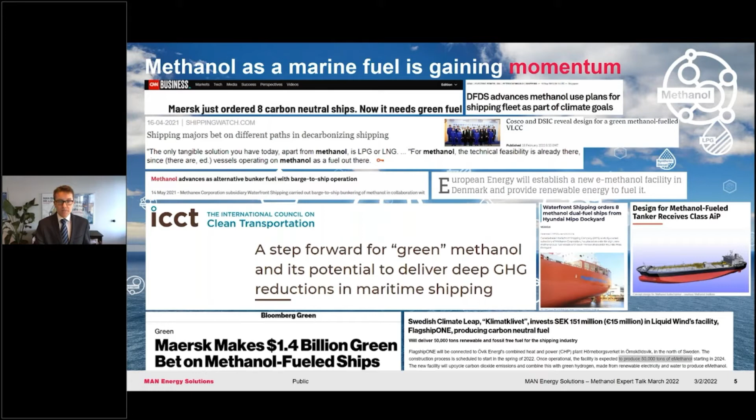Following that, in 2022, we have seen further order uptake for 4 more options for Maersk, as well as other orders. I will come back to that in a minute. But here are some of the headlines which we saw in 2021. Methanol as a marine fuel was really all over the media, and lots of projects are looking into this now as we speak. It is not only container ships which are inquiring about methanol engines, even though they are at the moment the main drivers.

It is also an increasing interest from bulk carrier segment, from tankers, ro-ros, and PCTCs. So in nearly all projects today, there are questions from the ship owners at some point regarding either methanol fuel from the outset or the possibilities for a methanol retrofit at a later stage.

This is an overview of our dual fuel portfolio, our portfolio of different dual fuel technologies available. We have for methane the ME-GI and ME-GA engines. We have for ethane the ME-GIE engines. We have for methanol the ME-LGIM engines, and for LPG the ME-LGIP engines. And from 2024, we will also have an ammonia-powered engine.

Today, we have more than 670 dual fuel engines on order or in service. So I think it is fair to say that we have really succeeded with our concept of future-proofing engines with the dual fuel options.

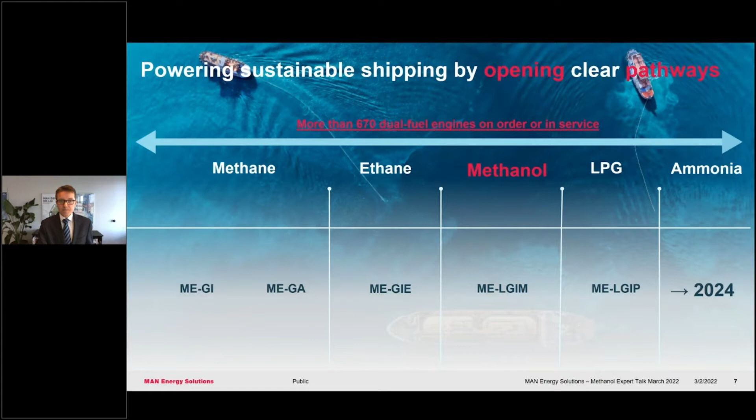This is an overview of the orders to date. As you can notice, the first orders on the lists are for methanol carriers and then chemical tankers, which can also carry methanol, so they can use their cargo as a fuel. And then halfway down the list, we see the order from Maersk Line for the 2,100 TEU container ship, and then later the big order for the 12 16,200 TEU container ships.

We are very proud as of today to be able to present yet another very large order. It is from Singaporean X-Press Feeders, who have placed an order for 1,170 TEU container ships with our S50 methanol burning engines. And we, of course, thank X-Press Feeders very much for this order.

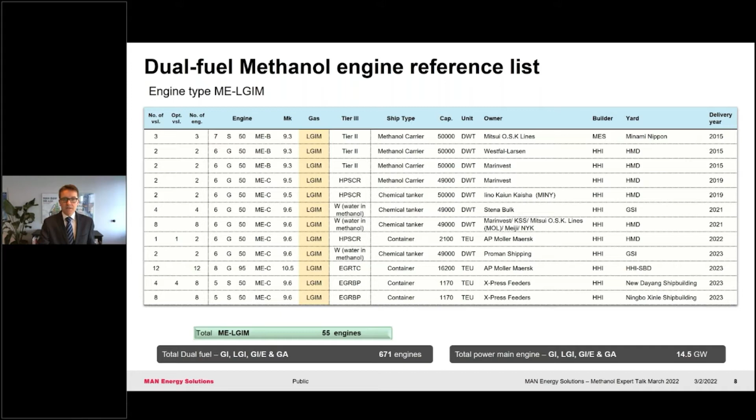The interest we see as of today is really huge. All kinds of engine sizes are requested, and for all kinds of ship sizes. Due to this fantastic interest, we have actually decided to enhance our design plans for future methanol engines in our engine program. So we are proud to be able to announce that we have decided also to make an S60 version of our methanol engine, a G60 version, and a G70 version.

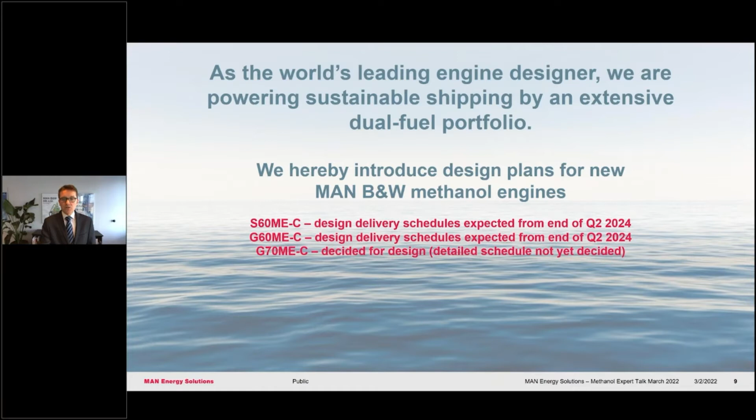The design schedules for the 60-bore versions is expected to be from the end of Q2 2024, of course subject to order. And this is exciting news for all of you, and I know that many ship owners have really requested us to step into this segment as well.

Our portfolio of methanol engines then more or less looks like this. The areas here with dotted lines designate our existing methanol engines in our engine program. We have speed on the horizontal axis, and we have power on the vertical axis. We have the G95 powering the biggest container ships. We have the G80 10.5 powering, for instance, 7,000, 8,000 TEU container ships, but could also power large bulkers or very large crude oil carriers.

Then we have in the smaller segment our 50 bore engines, both the S50 and the G50, and now the new decisions here to introduce the design plans for also G70, G60 and S60. And by that you can see that we are covering the whole range of necessary layout points for the ship designers to implement the methanol engines in nearly whatever ship type, as long as it is, you could say, from maybe 1,000 TEU container ships and up.

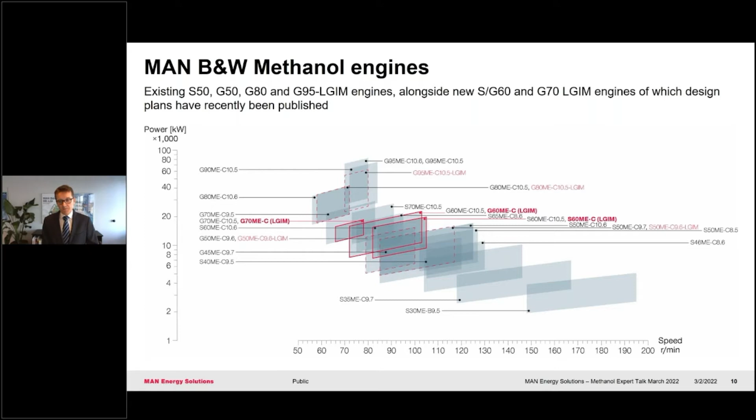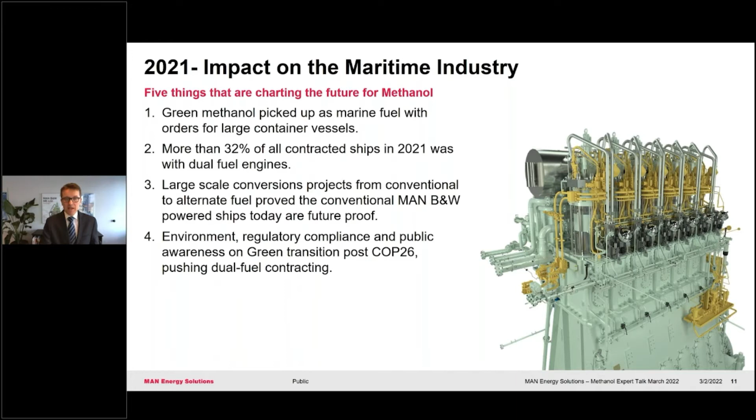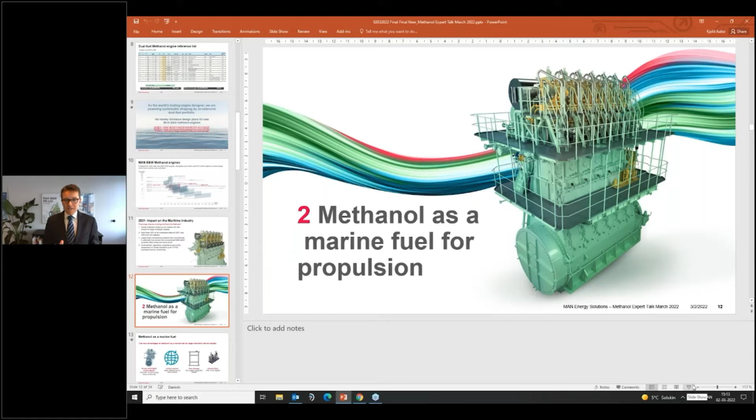So following this, I will hand over the microphone to my co-host, Kjeld Aabo, who will take you through methanol as a marine fuel for propulsion. Please, Kjeld, the floor is yours. Thank you very much, Thomas, and also hi from me. So, ladies and gentlemen, I will continue here and speak about methanol as marine fuel for propulsion.

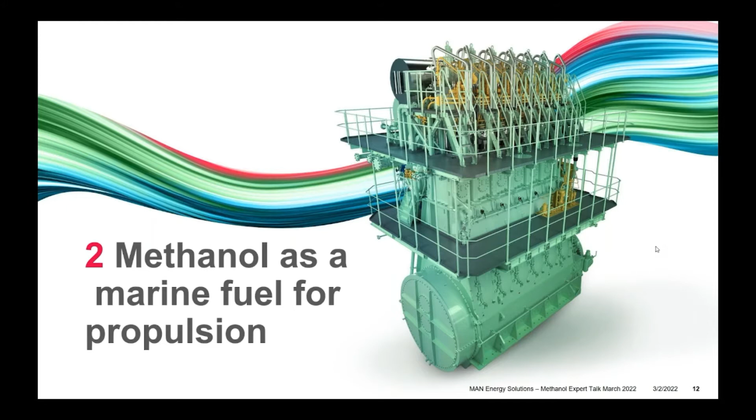As Thomas mentioned, the output from the engine is the same, as is the efficiency if you compare with our single fuel oil operating engines, about 50 to 55%, depending on what load you are operating at. If we look at the emissions, first of all on the methanol which is available today, we will see that compared to heavy fuel oil, we will have a reduction of 30 to 50% in NOx, 90 to 97% in SOx, 90% in particulates, and 10% in CO2.

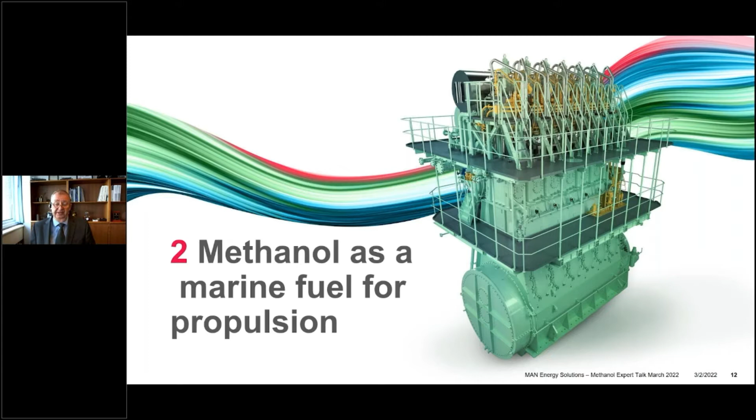If we consider having green methanol or biomethanol used, then it will be 90 to 95%. The rest will be for the pilot oil. And if we consider for the future, and that I think is very exciting also, to use biofuel as pilot oil, then actually we will have 100% CO2 neutral engines.

So if we look at the main advantages of methanol as a marine fuel for large merchant vessels, we have already proven the engine design in 120,000 running hours. We also have a user forum where we have feedback, and from the first engine on the water with methanol operating in 2016, we have every year held such a forum with feedback from operators in order for us to optimize the design and the best solution for the operators.

Global natural or carbon neutral green methanol can be used, of course, and give a carbon neutral output or emission. It's easy to store - I'll come back to that on the fuel gas supply system. And it's a very simple fuel gas supply system, especially if you compare it with the cryogenic system, which is for LNG and ethane.

We made together with Hyundai, DNV, and Methanol Institute a small study not that long time ago. We said to the yard, could you please make a calculation for the pricing on a vessel operated on single fuel oil, one if it was methanol operated, and one if it was LNG operated. If we take index 100 for the diesel operated engine, the single fuel engine, then for methanol it will be 110, and for the LNG fueled engine the vessel price will be 122. So you see there is quite a difference when we compare these CAPEX for the different fuels to be used.

And here, as I mentioned, we have the carbon neutral aspect, the easy storage, and simple fuel gas supply system, and I will come back to that part also.

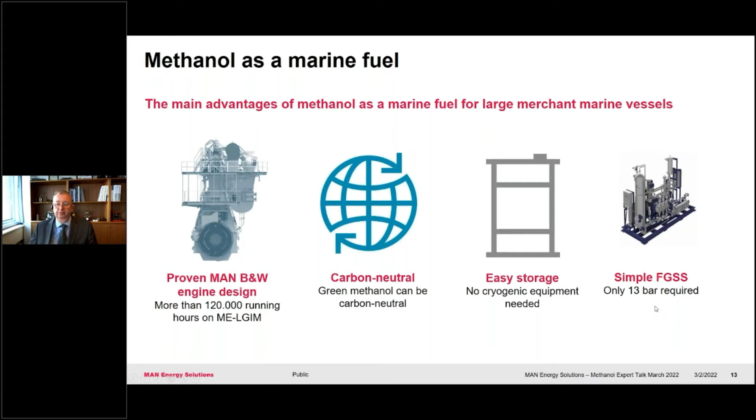About scalability in this energy transition, we will have for a long time a transient period where there will be some green methanol available, but it will take time before it's available in full scale. During that time, we are able on the methanol engine to operate with increasing amounts of methanol drop-in, for whatever is available out there, and still be commercially attractive.

As also mentioned by Thomas, we see a huge interest out there for being green, to decarbonize, but not only for ship owners, but also for charterers and end users. That is very important also to move this in the right direction for decarbonization of the maritime world.

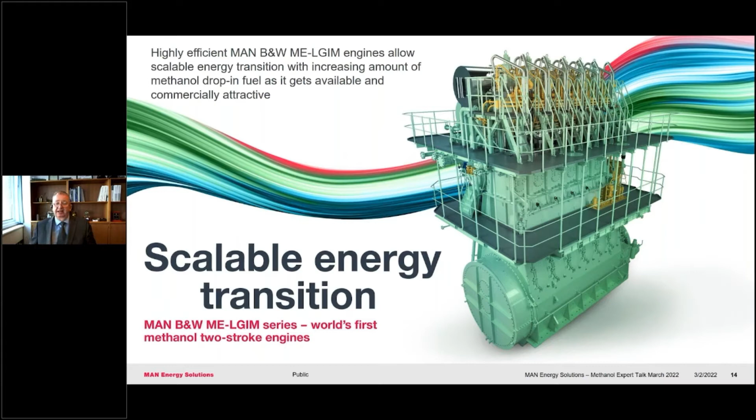If we look at the timeline, I can mention that in the 80s - I was in the company also at that time - we actually designed the diesel cycle GI, gas injection engine. It was at that time a mechanical engine, and it was primarily to be used for LNG carriers. That was the idea from the beginning, and then later on, of course, also other vessels.

We were also at that time looking at the diesel cycle versus the Otto cycle. The diesel cycle has quite a lot of advantages when it comes to the LNG part. But in general, the decision was made because then we could have so many different types of fuels using this principle, still with the same efficiency and power output. So that was the primary reason for choosing the diesel cycle at that time.

LNG was the first one we got the order for. Later on, it was methanol. And when we develop an engine for methanol, we make a lot of testing, of course - first of all in our research center here in Copenhagen. Later on, we made also, together with Mitsui and then Hyundai, additional testing.

Then in 2016, we had the first sea trial with this one. Then we developed Tier 3 compliance with water - so we reach Tier 3 NOx and SOx by adding water to the methanol, like gin and tonic, you could say. And as I mentioned before, we have 30 to 50% less NOx compared to heavy fuel oil, or also very low sulfur fuel oil, and that means also it's a limited amount of water we have to put in. Then we had NOx certification here with the W, and that is with the water injection.

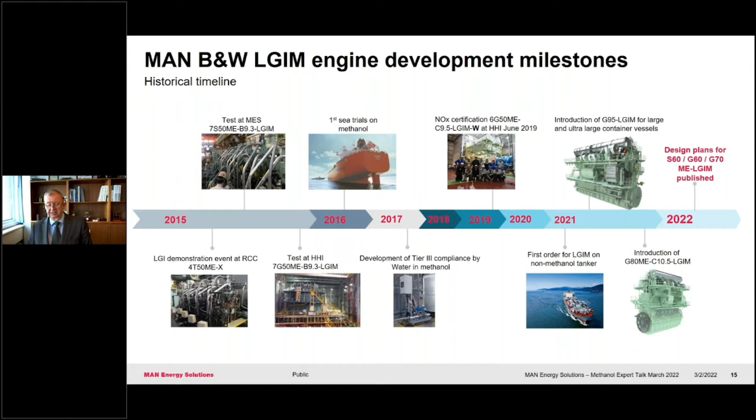And here we see, as also mentioned by Thomas, these 12 times 16,200 TEU container vessels. Just for a comparison, if you think about it, how much consumption will there be for such a vessel? If we take it at about 50% load and operating 270 days a year, we talk about 44,280 tons of methanol per year.

If we look at the smallest one, the first ordered container vessel at 2,100 TEU, then we talk about 10,881 tons per year for the same conditions, 50% load.

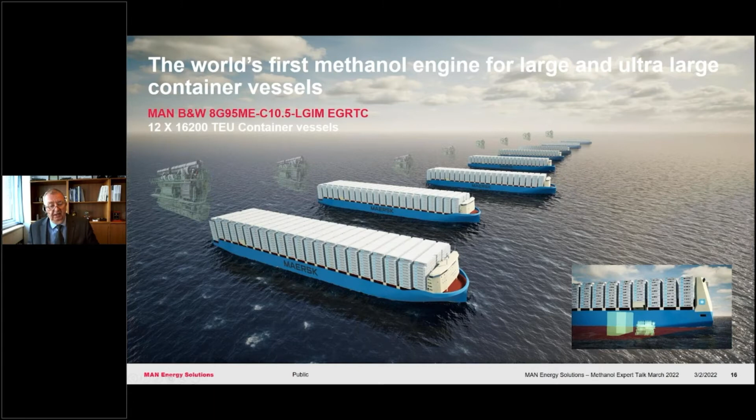In order to also look into the logistics, Maersk have already made, with a consortium of companies, it possible to actually get the green methanol, starting up from 2023 to 2030, and it's based on windmills at sea.

Looking at the engine itself, the methanol engine, it is, as mentioned before, a very simple fuel gas supply system. We need a system that can boost up the pressure to 13 bar. Then the methanol goes into the injection part on the engine itself, where it's further boosted up to 600 bar before the injection. We utilize a 5% energy fraction with a compliant fuel.

So operation on methanol from 10 to 100%. Regarding cylinder lube oil, we utilize the same lube oils, 40 BN with high detergency, as we also do for other low sulfur fuels.

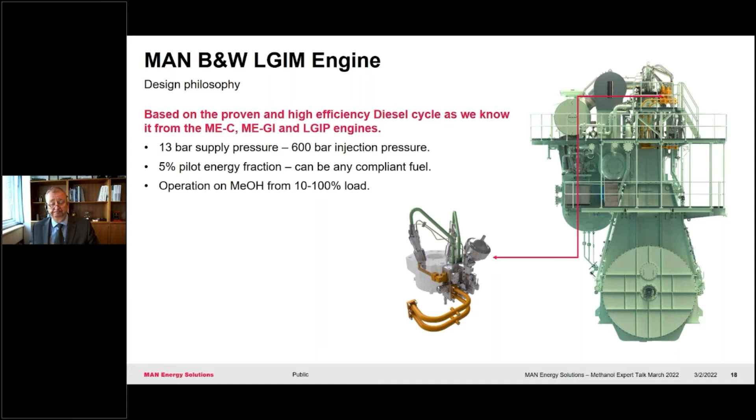If we look into the system itself, we have here below the double wall piping. In the double wall piping, between the inner part and the outer pipe, we have hydrocarbon sensors. So if there is a leakage, this will be detected. There is a continuous ventilation between the inner and outer pipe.

And if a leakage occurs, it will be transported to these sensors and will pass the hydrocarbon sensors. Immediately the safety valve in the fuel valve train will shut off the supply of methanol, and the engine will automatically change over and operate on normal fuel oil.

If we look at the methanol supply, this is made inside the cover itself. We don't have methanol in a single pipeline here, which could break if something falls down on it and so on. So this is protected for safety in the system here.

We have the total control block here, and we also have on this side the hydraulic oil. The hydraulic oil is there for controlling and boosting up the pressure, so we're boosting the methanol up to 600 bar.

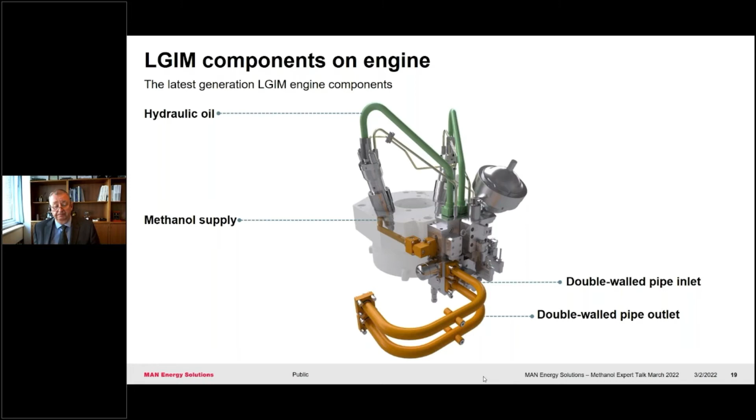We also have a hydraulic accumulator which secures proper power and proper pressure in the system, a constant pressure in the system. We have a fuel booster injection valve for methanol, and that's actually here inside where it's both a booster pump, boosting 13 to 600 bar, and then we have a valve and the nozzle itself.

The lubricity in methanol is very, very little, or you can say quite the opposite of having lubricity, and therefore between the plunger and barrel in the fuel pump, the methanol pump, we have a special coating.

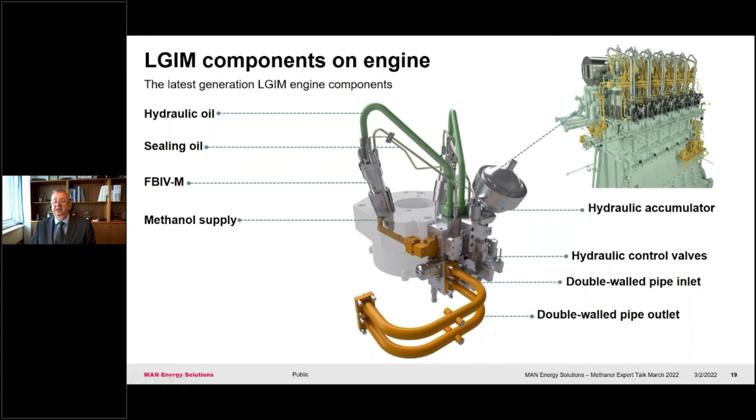Then we have a sealing oil, and that is where hydraulic oil can potentially be mixed with methanol. We have the sealing oil added at these special points in order to minimize that. We have the control valves down here, and you see where it's all located here on the engine itself.

Are we looking at the auxiliary systems? Yeah, then we take it and you can say make it in 4 or 5 different parts: service tank, fuel valve train, the ventilation itself, the nitrogen purging, and the low flash point fuel supply system.

Before an engine is finally designed, such a fuel gas supply system is also to be designed, of course. We need it also for the first test we are doing, in this case, on methanol. And there is a huge amount of work before such a system is designed.

We make hazard investigations together with classification societies, ship owners, shipyards, and also suppliers, as for instance such a fuel supply system, all due to safety. And in this case, we are speaking about a low flashpoint fuel, which was not part of the IGC or IGF codes at that time.

And actually, it came into those codes and regulations only 1 year ago, where it was introduced, which means much later than the first engine that was sea-trialed on methanol. The reason it was still accepted to operate on methanol was because ship owners got acceptance from the flag state, based of course on these hazard investigations that have been going on.

We also have in this unit the purging of nitrogen, so we are able to purge all the pipelines on the engine if something should happen. Because being a low flashpoint fuel, a number of operation scenarios call for a clean pipeline. So what we do is enter the nitrogen and purge and push out, you could say, the methanol.

We have the low flashpoint fuel supply system, and here we also have to prepare that in parallel with developing the engine on methanol, ensuring there are companies out there who can supply such a system with high reliability and availability, and of course the safety issues. Nitrogen purging.

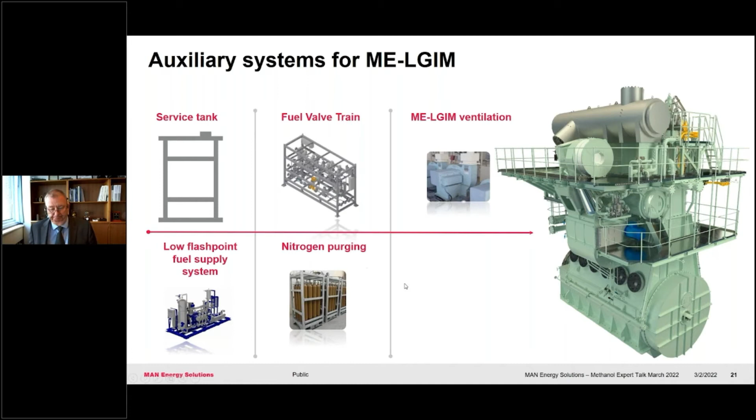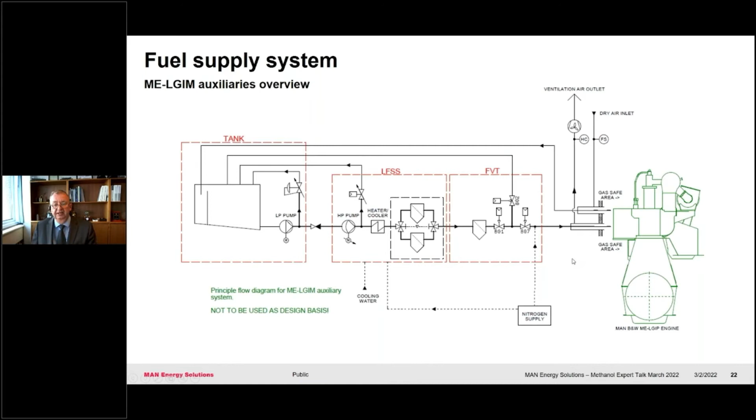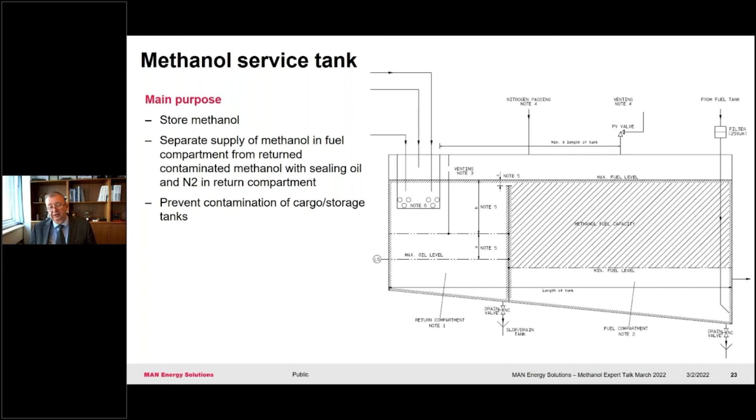Here we have the tank itself. I will not go too much into detail, but its main purpose is of course to store the methanol, but also prevent contamination of cargo and storage tank if, for instance, you are using the methanol engine on a methanol carrier. It separates the supply of methanol in the fuel compartment from the return contaminated methanol with sealing oil - remember the sealing oil on top of the engine itself - and nitrogen in the return compartment where we have the nitrogen from the purging part.

If we look at possibilities to make these upgrades, we can upgrade ME-C engines for different types of fuels. You can also imagine if you have an LNG engine today, and in 10 years' time ammonia becomes available at the right price and without carbon, then you can actually go and have your ME-GI engine upgraded to operate on ammonia.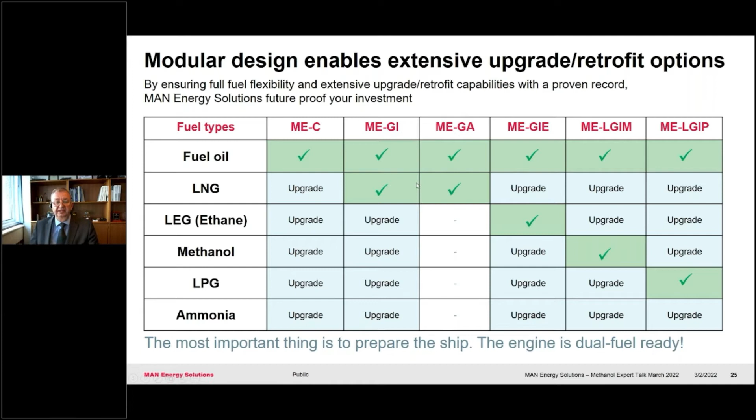At this time we have actually upgraded the following engines: one on ethane, from MEC engines, the fully controlled engine, to an ethane engine; 3 for GI, for gas, LNG; and then almost 12. We are still operating, or in the process of making, the last 3 of a series of 15 MEC engines converted to LGIP, the propane engine.

And we see a huge market for such an upgrade in the future. We talk about EEXI, CII, and all the things that have an influence on the efficiency itself and the pollution or emissions from the exhaust gas.

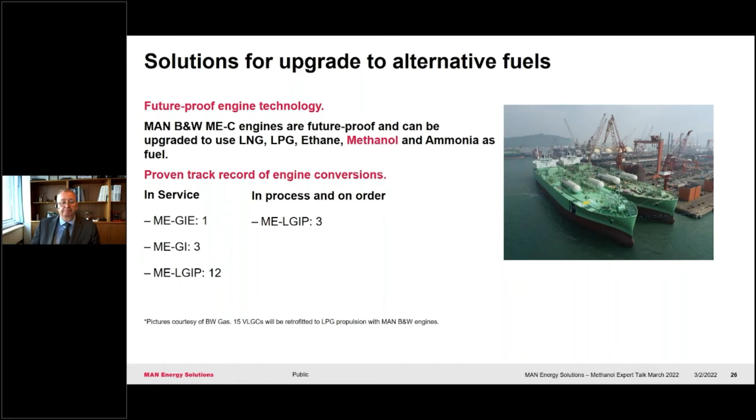What we see here is many ship owners ordering ships prepared for a future fuel or future dual fuel like methanol. The main engine itself is future-proof, meaning we don't make any preparation on the engine itself. That wouldn't be wise, because you don't know what fuel will be the future fuel for your vessel, and you should be able to convert to whatever gives the best business case. So we have upgrade ability for future possibilities - that is our standard ME-C engine.

Tank system, fuel flexibility, endurance and so on have to be prepared on the vessel, meaning there is a dialogue between the engine or vessel designer, the yards, the system suppliers, and so on - what can we do? Everything is actually prepared beforehand: only space and strengthened construction to be able to have tanks on deck, for instance, is considered already.

And we see that in a lot of projects - it's also included in the design with the hull structure, reinforcement and so on. If we look at machinery space, bunker stations, fuel supply systems, fuel valve train, hazard area classification, and vent mast arrangements - all of this has to be considered when you prepare your vessel for future fuels.

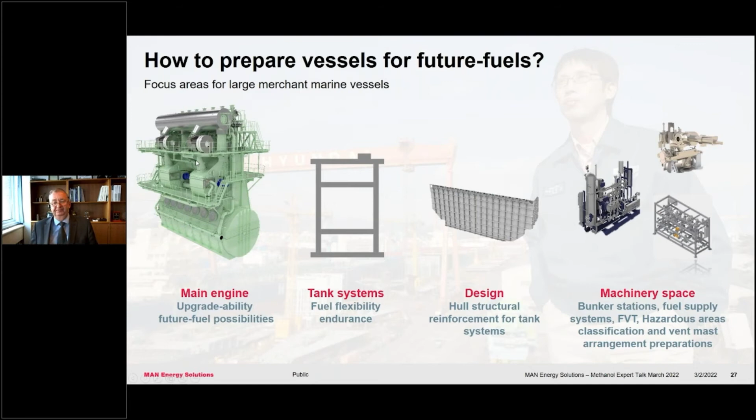We made a press release on the 28th of January this year regarding dual fuel retrofits of low-speed engines, which you can get, of course. We also have a separate paper about utilizing methanol in our engines, and we can advise about the fuel gas supply system. You're very welcome to come back to us about that.

We have about 22,000 of our MAN B&W two-stroke engines operating out there today, and about 3,500 are fully electronic control, like the ME-C engines, which have potential for conversion to these green fuels. It's further evaluated that approximately 2,300 of these vessels are appropriate candidates for upgrading, resulting in savings as much as 86 million tons of CO2 emissions annually - that's a big number, we could say.

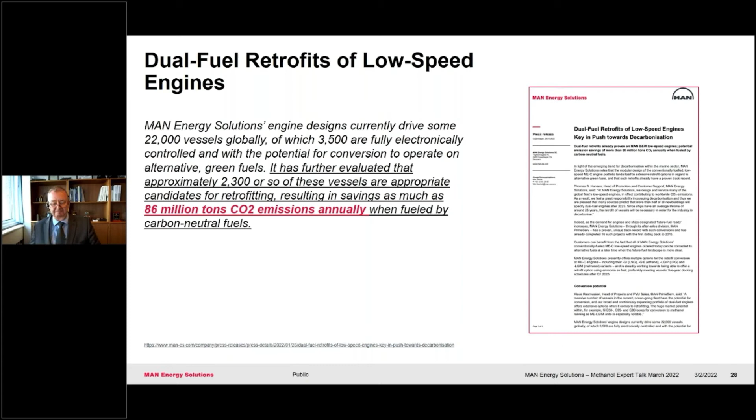We are also, from MAN Energy Solutions, engaged in a project in Chile, speaking about production of synthetic fuels. Porsche, also part of Volkswagen, is the initiator of this. It involves a methanol reactor for highly innovative fuels, with a goal of producing about 55 million liters in 2022 and 550 million liters in 2026 - based also on wind electrolyzers, which our company, MAN Energy Solution, is also a supplier of.

This is based on electrolyzing, where you split the hydrogen from the oxygen in water, and you filtrate the CO2 from the air, and combine the CO2 and hydrogen to make methanol.

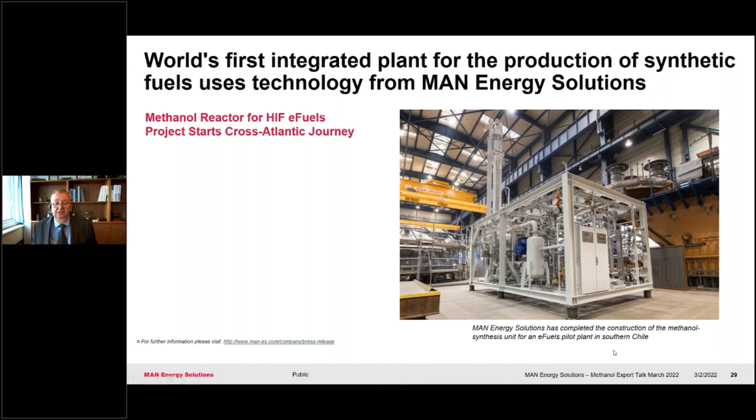So a small summary, ladies and gentlemen: we expect the uptake of methanol as a marine fuel to increase significantly. The proven MAN B&W ME-LGIM engines are available today for a wide range of vessels, as you saw from Thomas's layout of the different engines. The proven engines are available, and they can be fueled with very low sulfur fuel oil until green methanol is available at scale or at attractive prices.

Relatively simple auxiliary systems mean that conversion to ME-LGIM is attractive. Huge demand for green methanol provides a positive outlook for the supply of green methanol in the future, and we see huge interest to invest in this. So the whole distribution and production line will also work in the near future. Thank you very much.